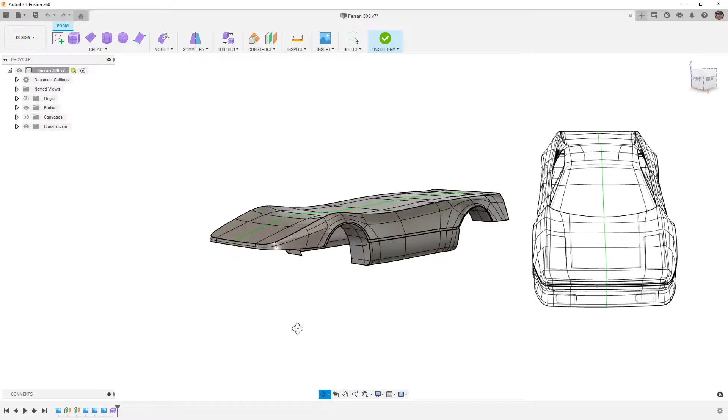We're going to tackle the front end of the Ferrari 308. Now, at this point, we have modeled a good chunk of the body. The process that we use to do the middle is going to be the same as the back, and actually the rear of the car is fairly open. There is a panel that's set in for the taillights and the bumper and tag, but in general, the body lines sort of end at the back, and that's kind of how a lot of cars of this era actually were made. They didn't roll down and have nice integrated bumpers like we see today on a lot of cars, and really that's based on crash safety and a few other things.

But we want to tackle the front end of this car. And it is important to note that there are different versions of the front end of this car. Ultimately, there's like a GTS and a GTB, and depending on the year and potentially the trim, you might get a different front bumper. So we're going to try to model this front bumper, and this is a pretty standard front bumper that you would see on the cars of this era.

There is also a wide body kit, and I mentioned very early on in the first video that the inspiration for modeling this car was based on a YouTube build on a StanceWorks channel where he's taking a 308 and he's doing a wide body. And the wide body is based on a Liberty Walk wide body kit for these cars. The Liberty Walk wide body kits are essentially fender flares. It takes this front lip and pulls it down a little bit farther. There's some more air openings and grills and stuff like that.

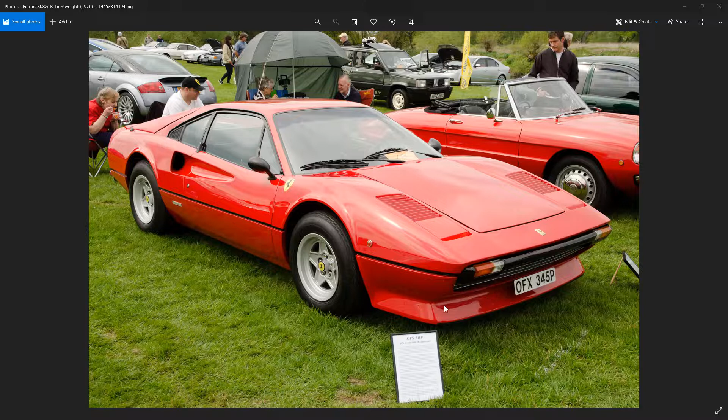So it is a cool addition, but it always starts with the stock car. So what we're going to do is model this as stock, and it might be a fun challenge to actually modify it and model things like the fender flares. So from here, let's go ahead and get started.

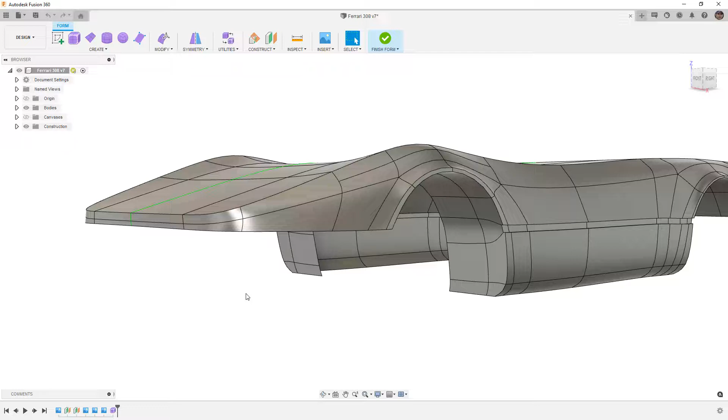So the front of the car has the same sort of gap that we created in the middle of the car. It's a nice feature, but again, as I mentioned in the side, it isn't really very easy to do in forms. It causes problems because we're trying to take this nice smooth body line and make this cutout. The way that we did it was extruding with creases, and it worked fine. But now we actually have to do this going around a corner, and that's going to produce its own challenge. So we have to think about the process very carefully.

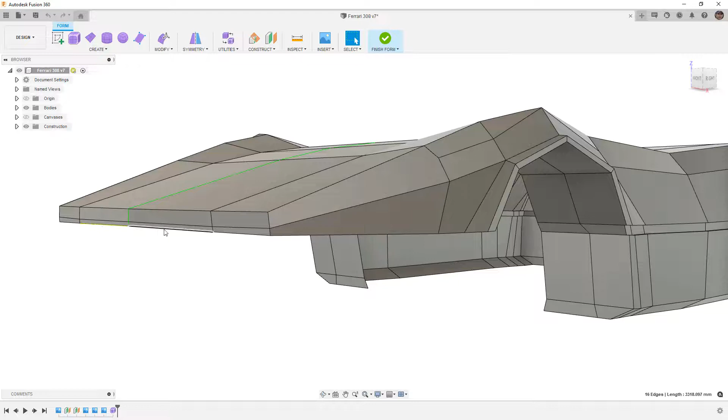Now, we could simply take that entire edge and scale it instead of extruding. I mean, it would be an extrude, but we could scale it in rather than translating it. But one of the things that we have to be real careful of is we're going across the symmetry line. And when we do that, we actually have to grab the entire edge. If we don't, at the middle it won't be welded together, and we'll have to go back and weld those vertices. So it's much easier to just handle it now.

By double clicking that edge, we are able to grab a lot of it. And then we're going to use our selection options to grow or shrink. When we shrink, you'll notice that it's not changing any of these selections, but we can use the loop grow or shrink, and we can begin pulling back some of those edges. What we're looking to do is get to the point before we actually had that crease. We really want to avoid that crease, and we're going to take care of those transitions manually.

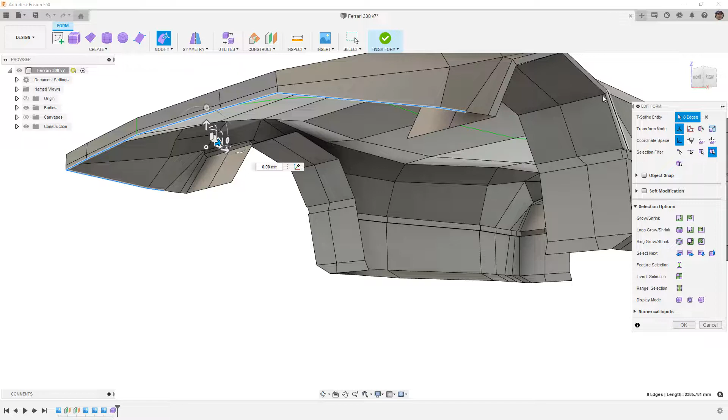If you want to control the flare a bit more, we could also remove this one from our selection, but I think it's going to work out okay. So I'm going to go to a bottom view because it'll let me actually see what we're doing here. And I'm going to use, again, Alt and Control because I'm on a PC, and then I'm going to use the scale in plane. So this option in the corner will allow me to scale in X and Y, and it'll pull these in. It's not going to be perfect, but it'll get us pretty close.

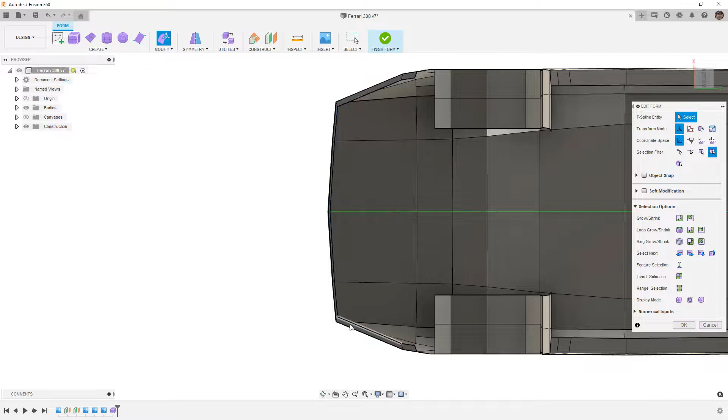I'm going to let go. Notice that we need to move a couple of these vertices, and also notice that I'm working in box display. Now, when we move these vertices around, we want to keep the width of this face as we're looking at it consistent. So that's going to be an important consideration. And this one here, we'll go ahead and move that.

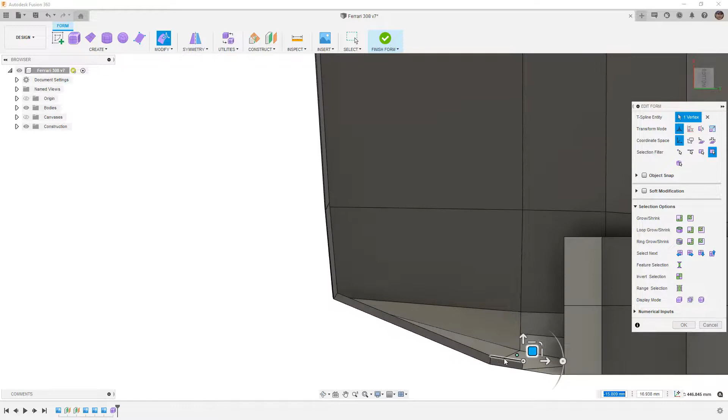And now that we've extruded this edge, we can double click on it. We don't have to worry about any additional selections, but we do need to move to a side view. Now we're going to use, again, Alt and Control if you're on a PC, and we're going to pull this down. We're going to extrude it down, and we want to make sure that we match the blueprint. So you might need to bring the canvases back. You might need to pull this up a little bit.

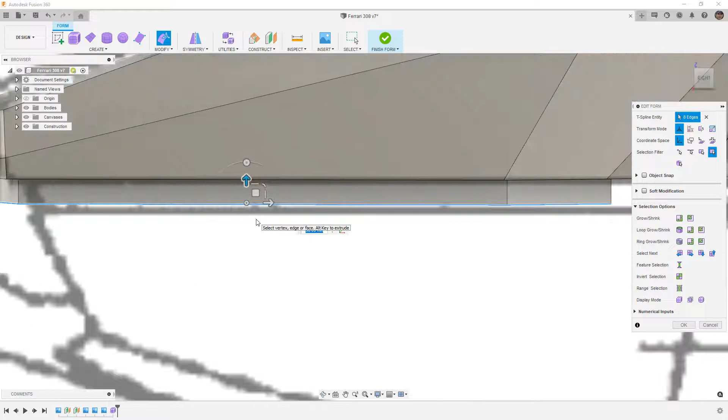And what we're looking to do is to get it to be about the same as the one back here. Now, if you remember the value that we used, then you can do that. I think it was 25 millimeters, but I'm going to go ahead and just sort of estimate. And then once again, Alt and Control on a PC, we're going to use Command and Option on a Mac, and we want to scale them out.

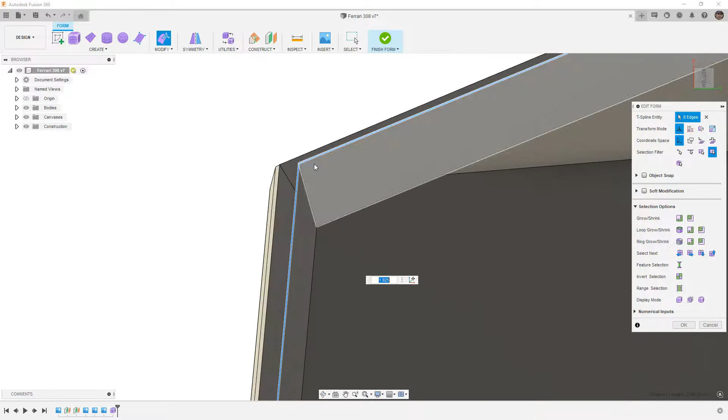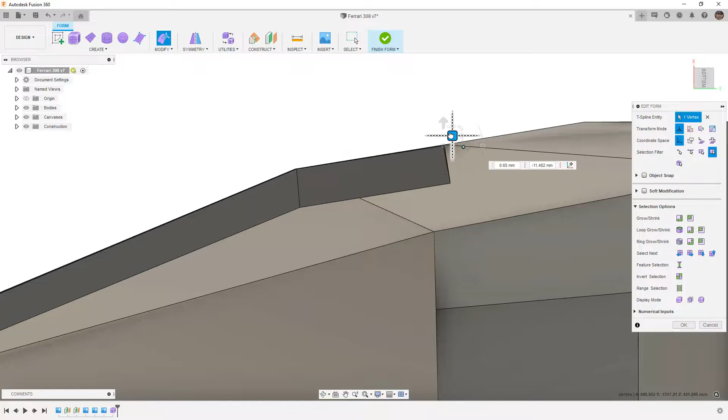And then once again, we need to come back and fix the location of these vertices. So I'm going to pull that out until it's about vertical with that. I might want to pull it back just a little bit. And we'll take a look at this one here. I'm going to pull that out. And we'll take a look at this one over here. Pull this one forward. And same thing here. Pull that forward. So at this point, what we've done is we've created the lip.

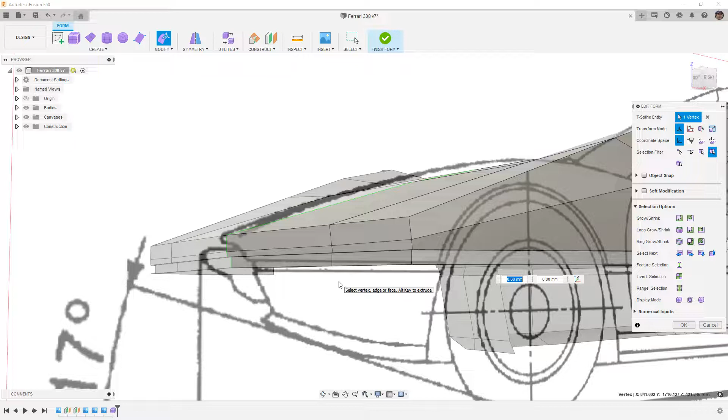And of course, in the center, it actually is not going to be there. It's going to be non-existent because most of this gets cut out for the original bumper bar that had turn signals and a grill underneath it. But we're still going to build it as if it's there, and then we'll get rid of it later. That's not necessarily a requirement. It's just the way that we're going to approach this.

And then again, I'm going to double click this edge to grab the loop. You can use the loop selection options if you want, but double clicking works pretty well, especially if you already have what you need. So again, Alt and Control. This time I'm going to pull this down and back. And here is where it gets a little tricky because what we're doing is we're trying to follow the curvature. So I'm going to go ahead and let go of that and then hold Alt again and pull it down one more time.

And then I want to take this edge and bring it down, but I want to sort of move these around because remember we have more geometry that needs to come down. But what I'm trying to do is get these vertices to be lined up where I think they should be to make a nice, clean and consistent patch.

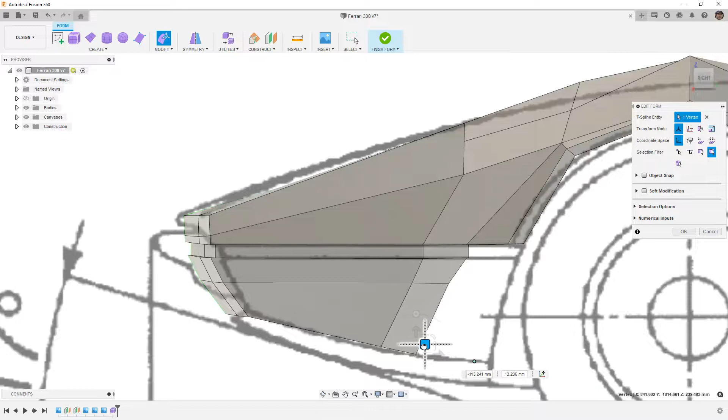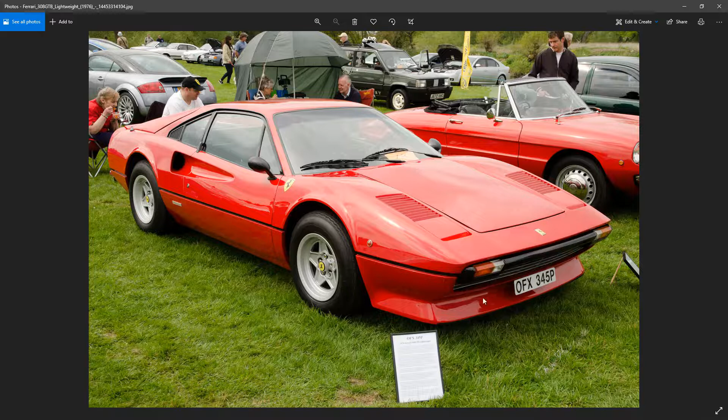Now, I'm using the term patch, which is also a surface type of tool, but in this case, I'm really just talking about the layout of these different divisions. There's other things that we can call them, but that's just kind of what I'm working off of. And keep in mind too, if we bring back a picture of the car, there's a lot of detail that's going to happen in here. This bottom lip flares out and then it kind of flares in, but it's sort of wide here. So there is probably going to be some more subdivisions here.

But let's look at this from the side and let's just see where we're at. So this version is actually the smaller front fender or the smaller lip. It's not the low one. The low one is going to come down to pretty much the body line.

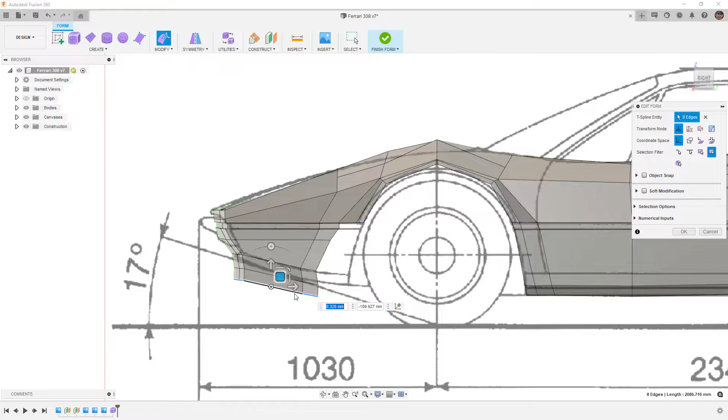Since I already know that we will need more control in this area, I'm going to extrude this edge again, holding down Alt, and I'm going to do it one more time because I want to keep this edge here roughly horizontal. So I'm going to take some of these vertices, and again, I really urge you to work in 2D. So we're looking at this from the side, and we're only moving in plane. We're only moving, in this case, in Y and Z.

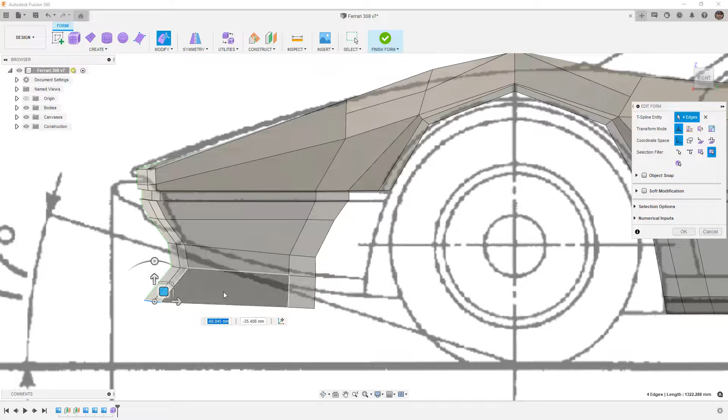When you start to try to move things around in 3D, it becomes really cumbersome. It becomes hard to control, and it can just kind of get away from you. So we're going to pull this down, and this is actually going to come back out. And I'm just going sort of by feel because I don't have a blueprint here for this. Let's go ahead and switch back to smooth display for a second just to see if we're even close.

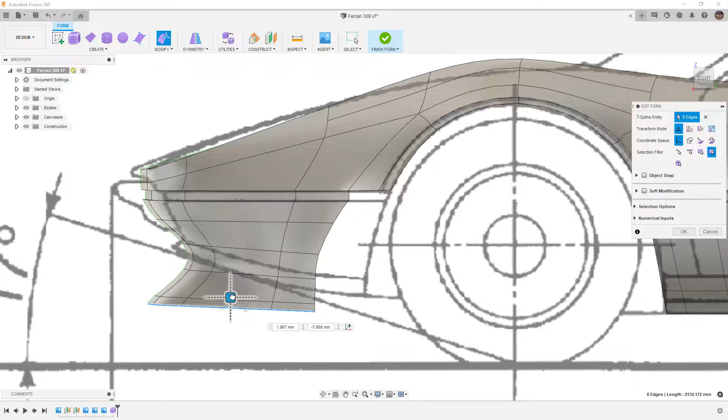I think I want to take these faces and pull them back a bit more, make it a bit more drastic. And this bottom edge, I'm going to extrude one more time, and I'm going to go ahead and just hold down Alt and pull this down, and I'm going to make a very small division there. And the reason I'm doing that is to sort of give me that lip, something that I can control. So if we go back to box display mode, you can see that we've got that lip there.

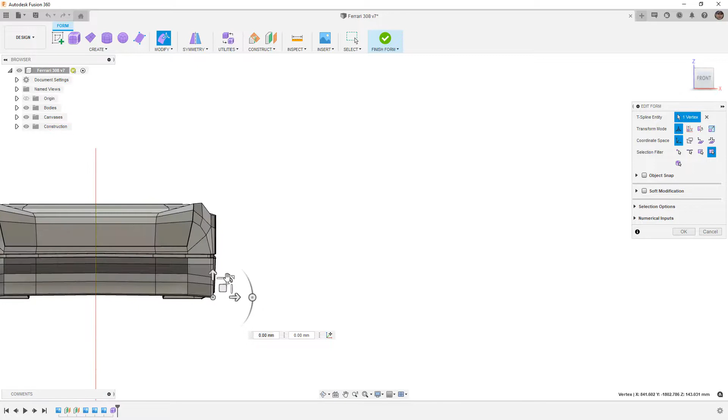Now here's where it's going to begin to get tricky because we need to carry these lines underneath and then flare back out. So from the front, when we're looking at this, these vertices are going to end up coming in on the side and then flaring back out. And as they get closer to the wheel well, they're going to flare back out to wherever the wheel well is.

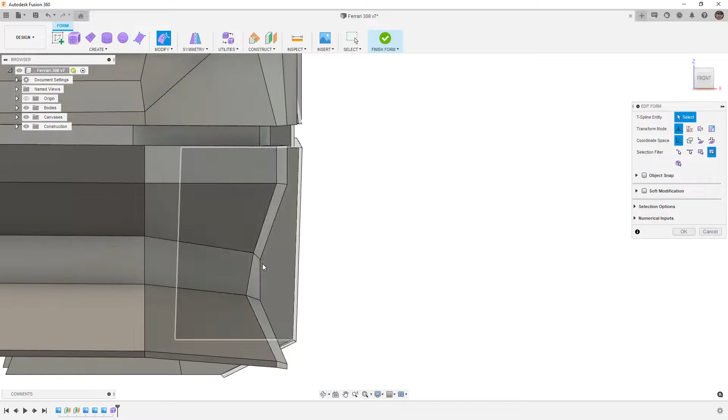And again, because we don't have an image for this, we have to kind of use our best judgment, but we're still going to follow the same process of trying to keep the distance between these edges the same and consistent. And then when we view this from the right side, remember that we're going to continue to build back. So that looks pretty good so far. And in a smooth display, it's not perfect. It's not ideal because I think we need a little bit more control in the middle, but it does get us pretty close.

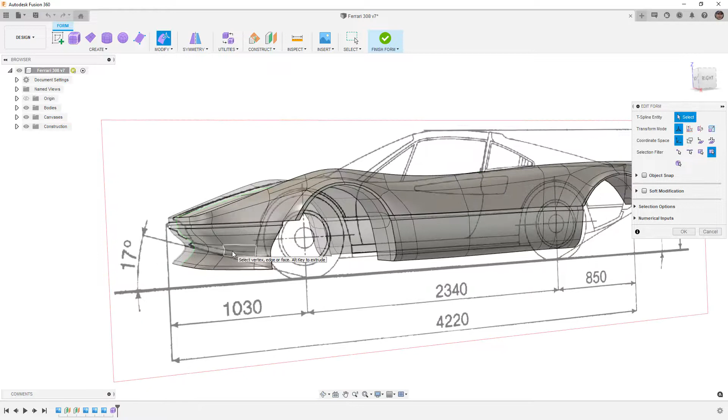In order to get this a little bit closer, I'm going to take this edge and I'm going to pull it down closer to this edge. I might want to pull this one up a little bit as well. And the reason I'm doing that is to get a tighter crease. I think we're actually going to end up adding more edges here. And I probably want to pull these two back a little bit just to get that tighter transition.

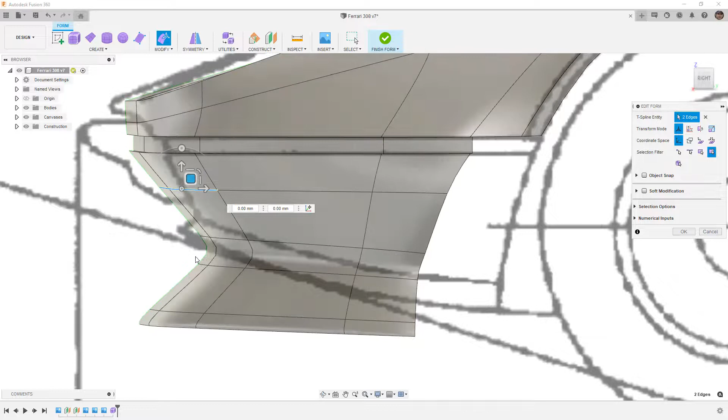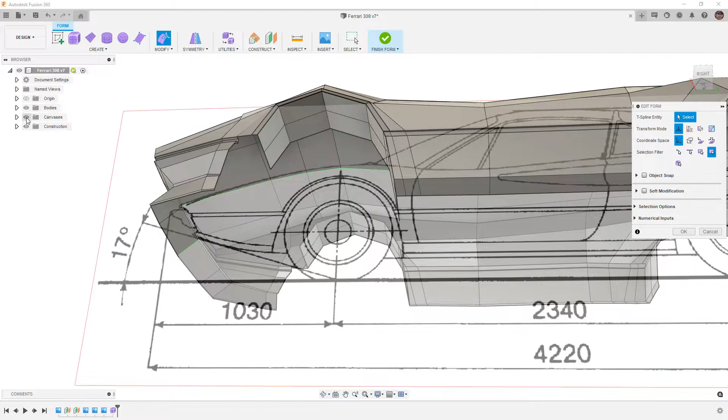Okay, so that's looking a little bit better. Again, we need to flare out the sides, but this is the process that we're going for. So that looks pretty good. Let's go to a side view and back to box display, and let's begin building out the rest of this fender. So I'm going to turn off the construction geometry and canvases, and I want to just sort of work this back into the fender.

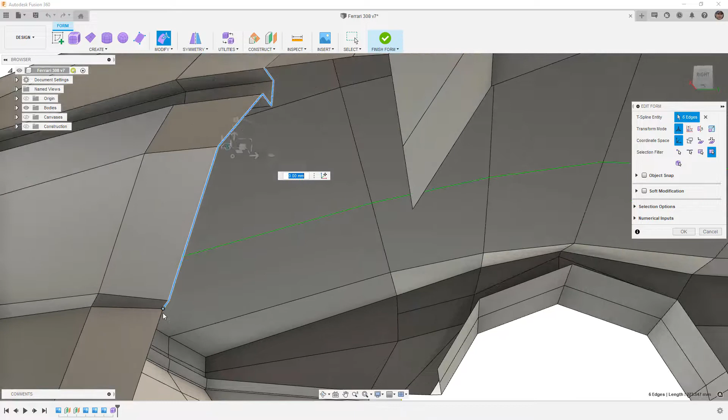Okay, so we're going to take this edge and we're going to just select all the edges as we go down. Again, remember that we can use the grow or shrink option. We need to be kind of careful depending on the geometry that we're selecting. So we're going to grab all the way down to the bottom, even this lip here. Go to a right-hand view now that we have that selected.

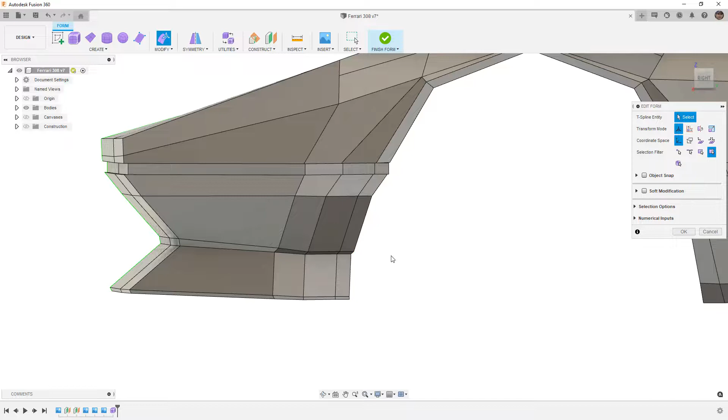And I want to start extruding that back using just Alt. We want to keep that curvature continuous, and we're going to go back until about where that edge is, and then we're going to do one more. All right, so this is going to get tricky to control. Before we do anything with the control, we're going to go to Modify, and we're going to Weld Vertices.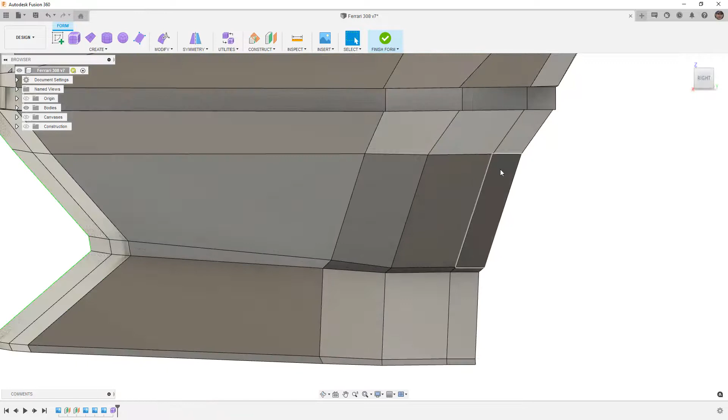We're going to bring this one out to here, this one out to here, and then we'll worry about adding a T-point later. Right now, I'm just worried about getting those connected, and then we're going to start to work on the shape. So from the right, I know that this needs to essentially follow the fender line and roll in. So it's going to be difficult for us to see from the front because we just extruded it back.

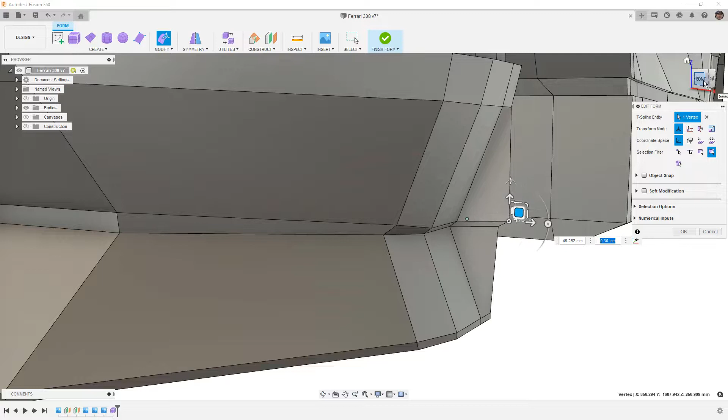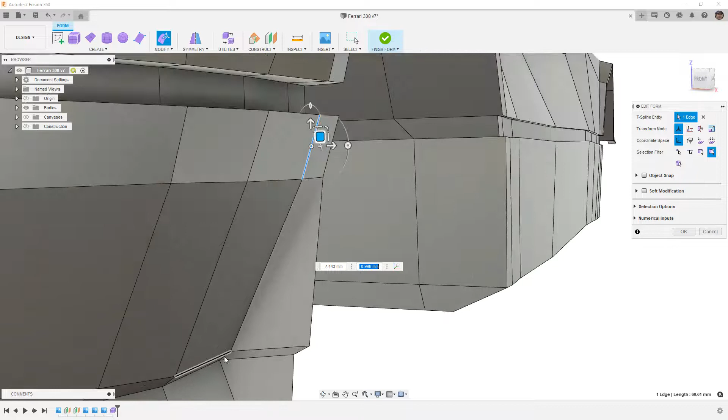So what I'm going to do to make this easier is I'm going to go to Modify, and I'm just going to start pulling some of these out. And I'm only doing this so I can see them. Then when I view this from the front, now it's a bit easier for me to see what I'm working with. I can see the line of the fender here where I'm expecting them to go, and I can see where they actually are. So I know that this edge needs to come out, and then this gives me a good reference. And I think I'll probably bring this out a little bit as well, and maybe even bring this edge out. Not quite as far because I still want to see and focus on that.

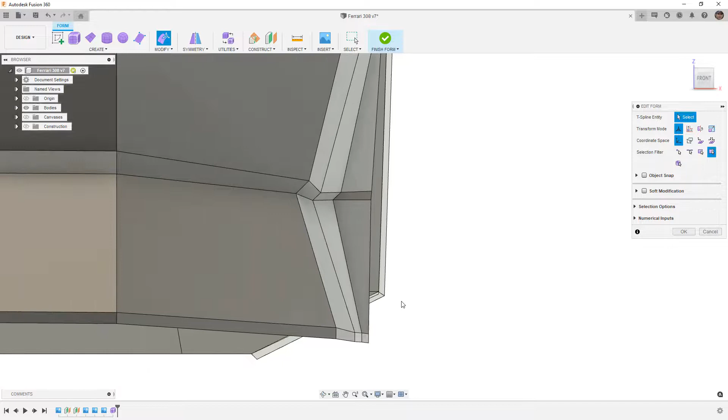And then from here, we can begin to determine what we want that shape to look like. So I think this vertex is going to start to go in. This one will start to go in as well. And we can always pull some of this other stuff in. So again, that'll give us visibility of what we're trying to work on. And we can also see where the body line is here. So this is where the body really starts to roll under, and it gives us a good reference of where we should be with our geometry.

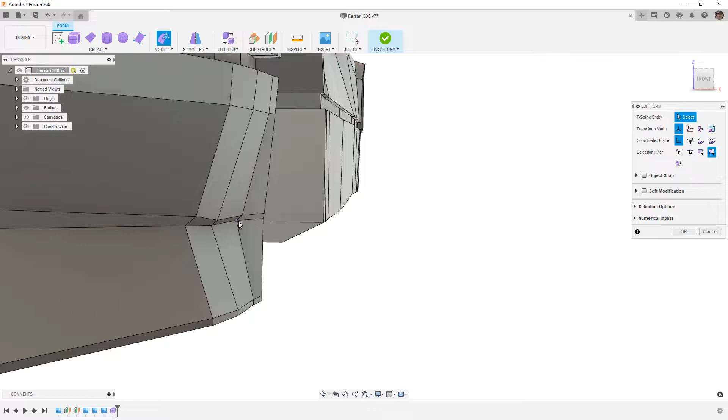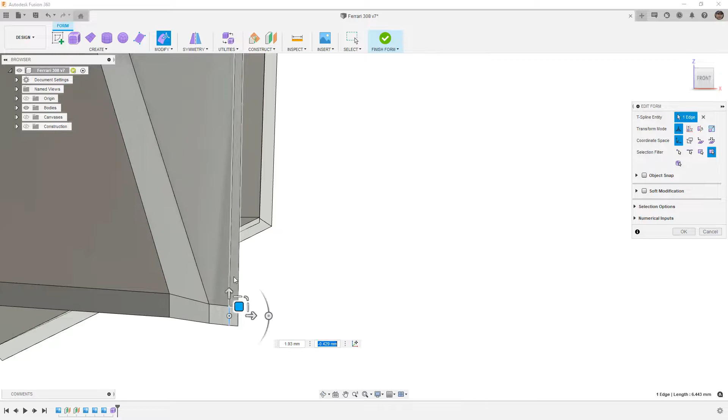Let's take a quick look at this in smooth display. You can see that it flares out pretty drastically at the edge, and that's not what I want. So I want to bring these vertices out to meet it. Okay, so again, from the front view, I want to bring this vertex out. And what I'm looking at, again, is a consistent width here. I don't necessarily need them to be perfectly in front of each other, but I want to keep that consistent width. That way, when I'm working on these different areas, it's nice and smooth in terms of its transition. Now, if I take a look at this in smooth display, you can see that looks much better.

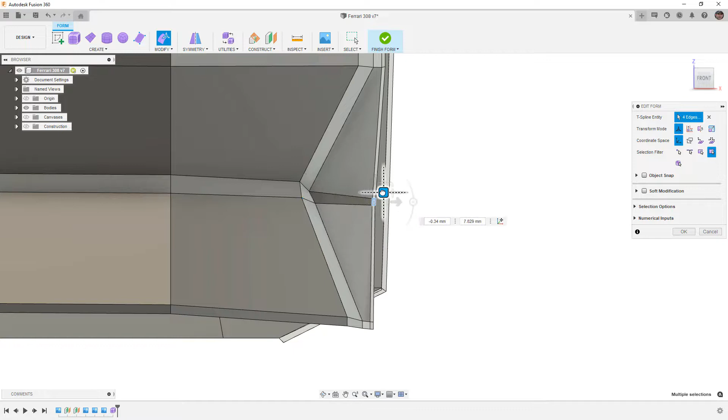This stuff needs to get pulled in quite a bit more, though. So in box display, I want to take some of these vertices and pull them in to make that flare more drastic, and I want to keep it horizontal with these other edges. So I'm going to bring those in, take this edge, bring it in, and I might even need to bring these up. And you'll notice that these are tapering a little bit closer together, and that's not necessarily a bad thing if we want the geometry to taper. So if we want it to appear to flare in or crease or flare out, then we can control that by the distance between there.

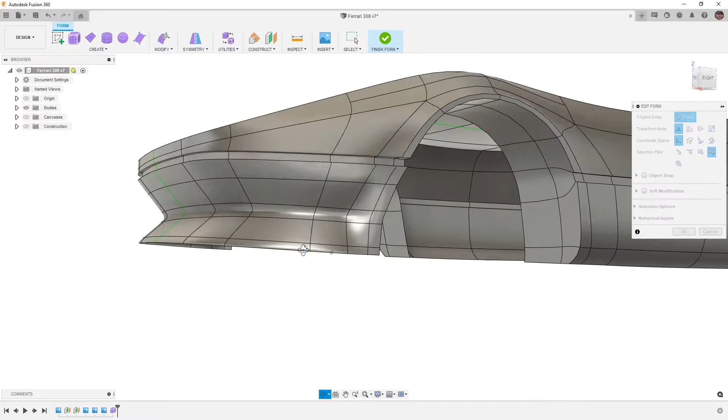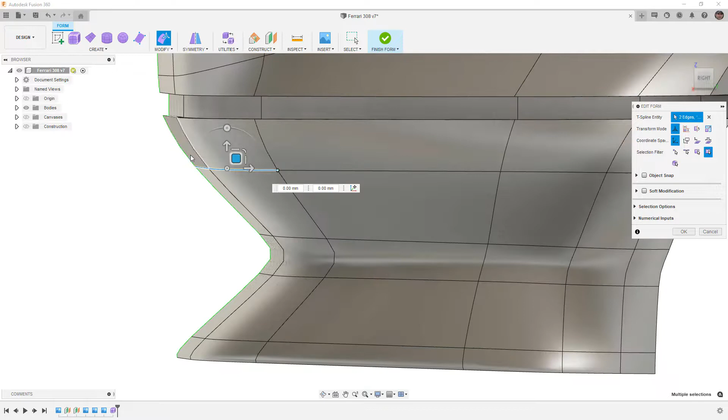So now if we go to smooth display, you can see that we're getting that transition. We kind of have the shape that we're looking for, but this really needs to roll down before it rolls forward. But now that we have some control, we're able to begin tweaking and changing it. So from the side, I'm going to take these two edges, pull them forward, look at it in smooth display, and that gradual transition looks a bit better. We could spend a lot of time trying to tweak and change this, but that looks pretty good.

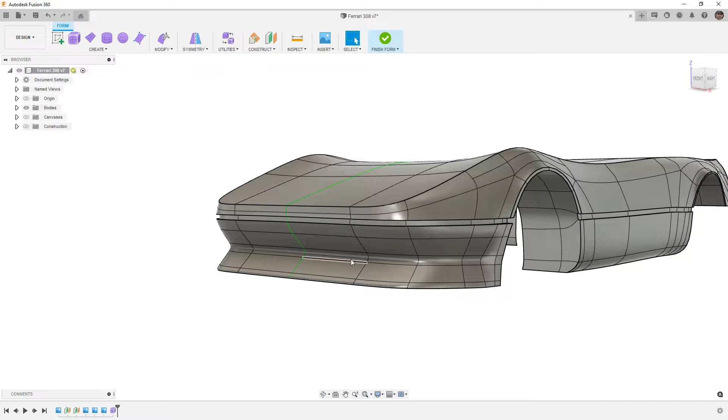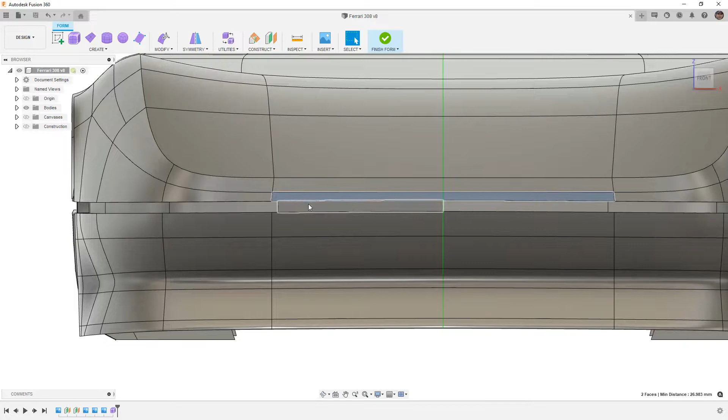All right, and this is one of those areas where it really makes sense for us later on to use surfacing tools in order to cut the geometry away rather than to try to make those openings here. We can certainly try. I'm going to save it before I do. There are a couple different ways that we can make this easier on ourselves. We know that the fender line on the front bumper kind of comes in. This section is gone on the car, as is this section here and this section.

The rest of it is kind of left open. So if we want to get rid of this, there are a couple different ways we can do it. The crease, of course, makes it more challenging. But one thing we can do is come in and delete these edges.

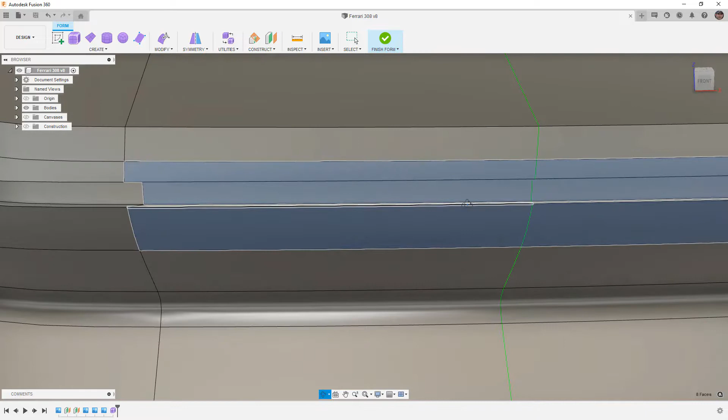Let's go ahead and rotate this around. We need to make sure we select them all, so you'll probably need to rotate until you find them all. Then, looking at this from the front, we can hit delete. Now it doesn't look anything like the car.

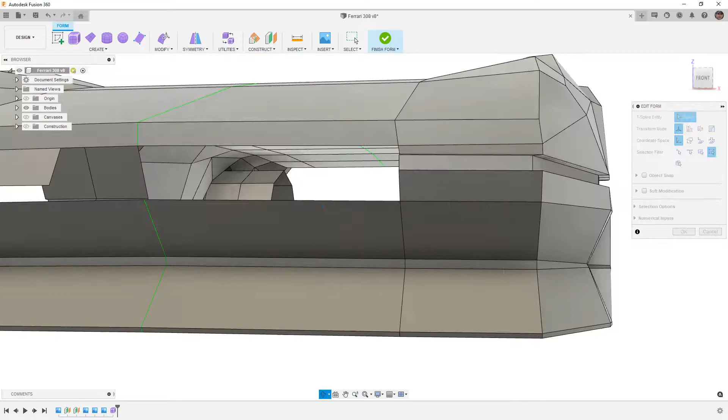And the reason for that is because we need to extrude that stuff back. So if we want to extrude it back, let's bring this out. We need to extrude it back with a crease. I'm going to take these edges and use Alt and Control, and move them back in this case, in the Y direction.

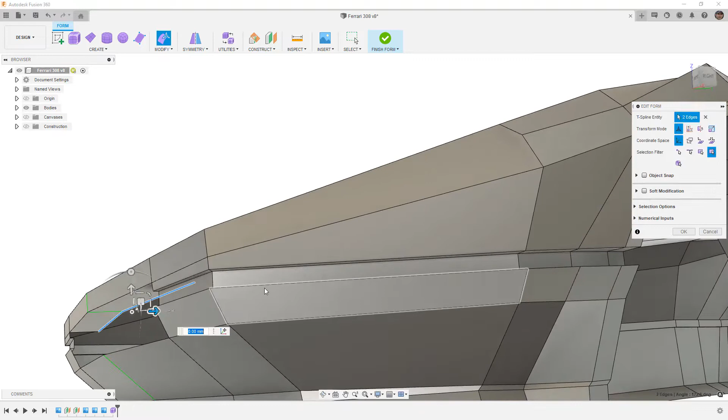So Alt and Control, and I'm just going to go straight back. What I've done is crease that, and that's going to help give me the shape I need. I'll need to do the same thing on the bottom edge. Again, it's more complicated than if we were just doing it with surfaces, so I do want to make that disclaimer.

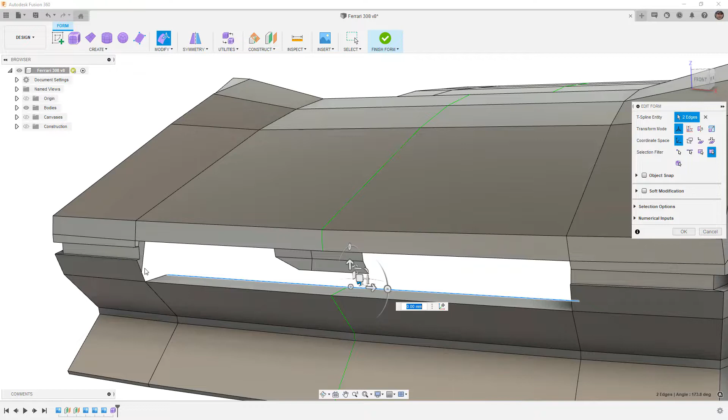It's not the best way for us to do this, but I do want to make sure we explore it. From here, where we really need to be careful is that all of this stuff needs to be extruded back. I'm going to do it just on one side. Let's zoom in, make sure we select everything. It's going to get tricky, but again, Alt and Control, and let's pull it back. The reason it's going to get tricky is because of this edge.

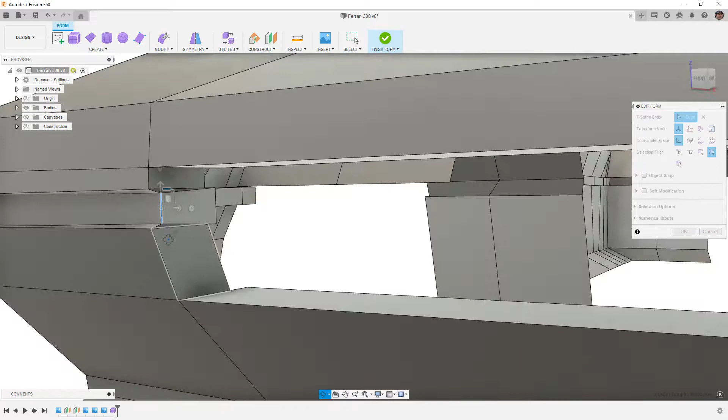I'm actually going to shrink this edge down a little bit. We probably won't notice it in any images or renders, but I'm going to shrink it down and taper it in, and that's just going to make it a little easier for me. Then this one I'm going to pull back forward a little bit, because I want it more in line with this.

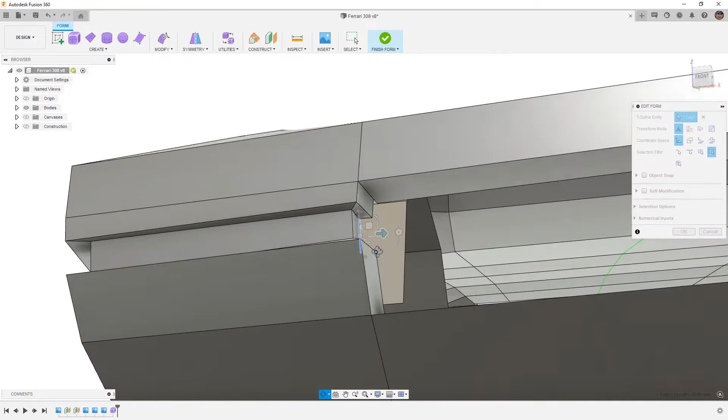Just to make it easier to select, I'm going to push it back in, which also helps sort of hide it. Now we need to go to weld vertices and put some of these together. So I'm going to take this one to here, rotate this around, and take this one to here.

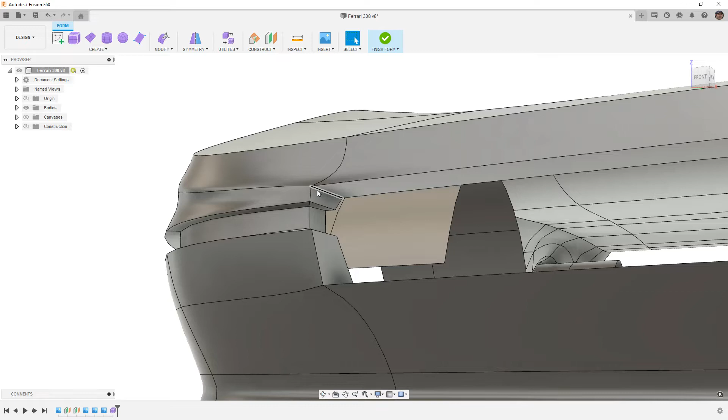In order to get this to look right, we're going to have to create some creases. Now, again, it's not ideal, and you can see what it did to the rest of the geometry. If we want a truly good representation of this, it's going to have to be done with a lot of different edges. Honestly, it's really not worth the hassle.

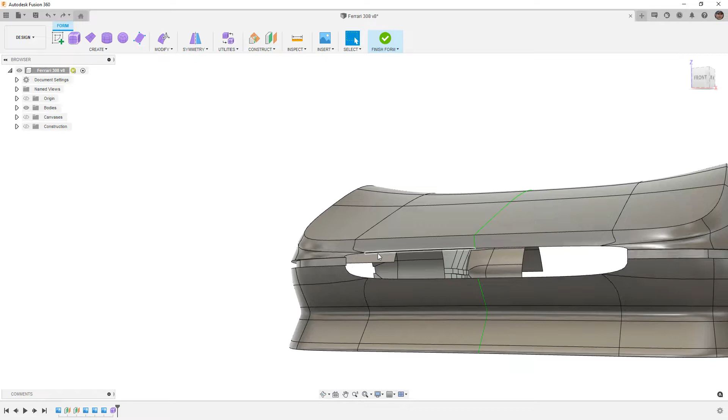So I'm going to use Control Z, hopefully we can get back far enough to before we deleted everything. And this looks a whole lot better, right? That's why I think it's not worth the hassle or effort to try to make those grill openings, because what you'll end up with is a lot of vertices needed to control that shape in that area. Obviously the shape is relatively simple to control at this point, we don't have a lot of divisions, but it's going to get a lot more tricky.

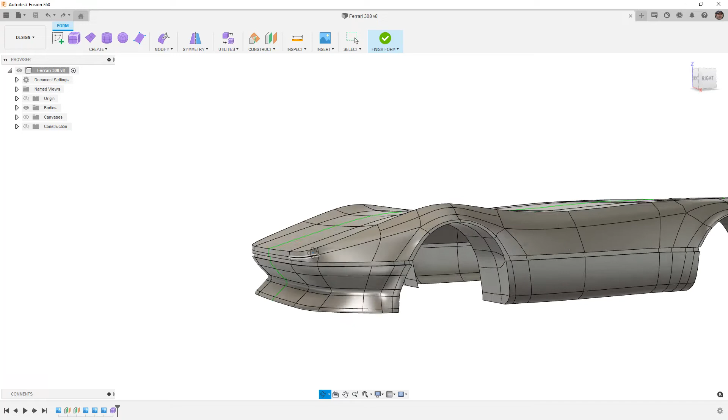So things like the headlights and the grill openings and other features that can be easily done with sketches and parametric features in the design workspace, that's really something we should focus on there. But at this point, we want to make sure we've saved any work.

If you want to try to make that grill opening, go for it. Just note that it is going to be a giant headache.